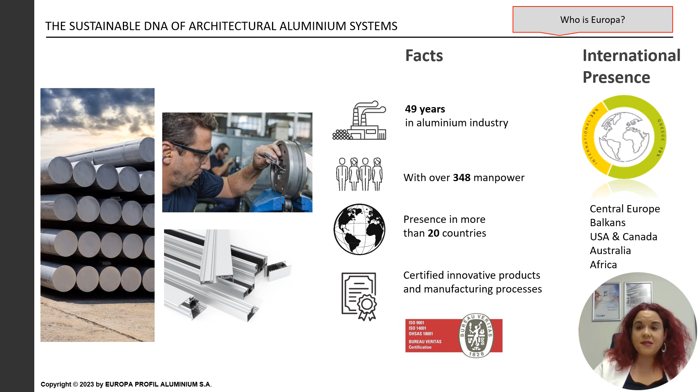Firstly, let's see some basic data about Europa. Europa has almost a 50-year history in the aluminum industry with over 348 people manpower. It has presence in more than 20 countries, producing certified innovative products through its manufacturing processes. Europa has international presence, like in Central Europe, Balkans, USA and Canada, Australia, as well as Africa.

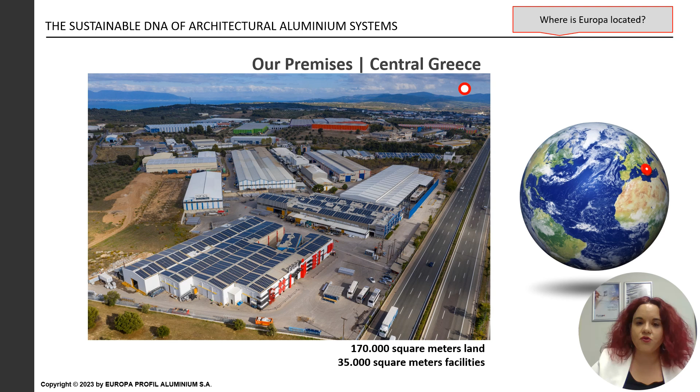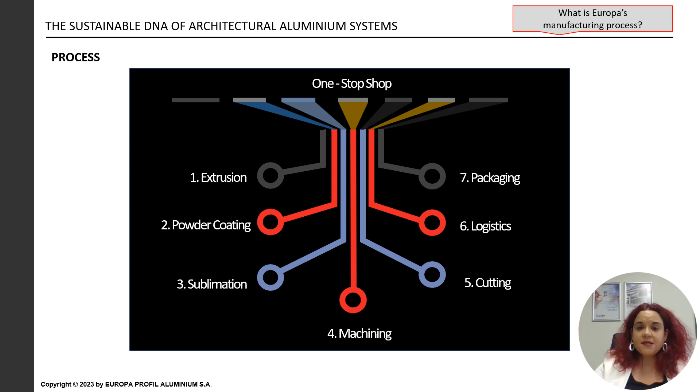Europa's premises are located in Inofita in central Greece, on about 170,000 square meters of land, and specifically, our facilities cover an area of 35,000 square meters. Europa's manufacturing process consists of the following departments: the extrusion lines, the powder coating and sublimation lines, the machining and cutting operations, and of course the logistics and packaging operations.

Europa has expertise in aluminum systems. Aluminum systems are divided into four significant categories. The first one refers to the architectural aluminum systems, like opening, sliding, folding, roller shutters, insect screens, office partitions, and curtain walls. The second category is the outdoor systems, like louver shading systems, pergolas, security doors, railing systems, and aluminum panels.

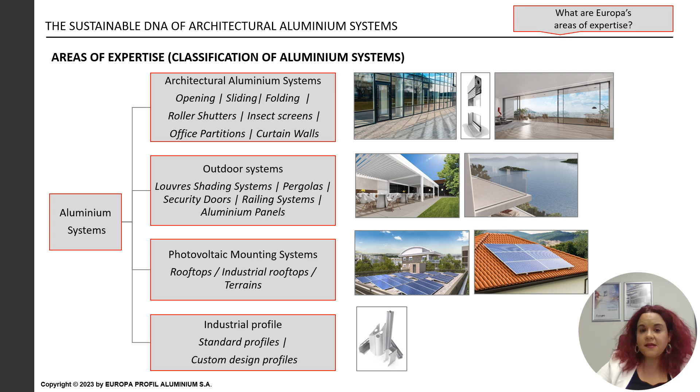The third category is the photovoltaic mounting systems, such as rooftops, industrial rooftops, and terrains. And last but not least is the industrial profiles, like standard profiles and custom design profiles. Europa's product applications can be found at home, like doors and windows, ending in energy efficient houses, at the office, like facades, windows, and partition walls, and of course in tech, in the form of transportation parts and robotic compartments.

The advantages of aluminum are numerous. Beginning from its recyclability over 90%, aluminum has long service life and low maintenance requirements. It releases no dangerous substances, so it's a non-toxic material. It offers fire safety and a wide choice of alloys. Furthermore, it has design flexibility and numerous surface finishes. It is a lightweight material with high reflectivity and thermal conductivity, offering optimal security, corrosion resistance, and of course sound absorption. From all the above mentioned points, it is concluded that aluminum is a sustainable material by definition.

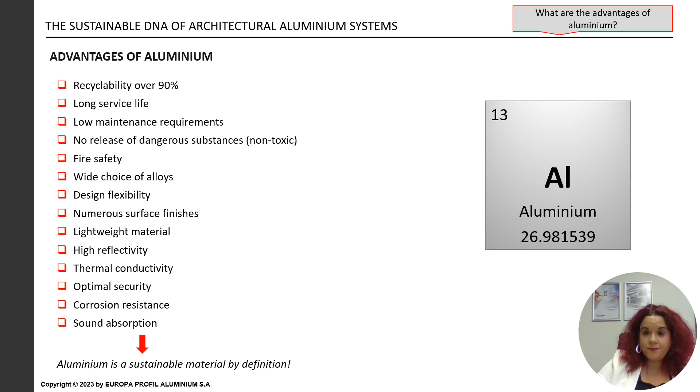Based on their technology, the aluminum systems are divided into two significant categories. On the one hand, there are the mill-finished systems, which consist only of aluminum, and on the other hand, there are the thermal break systems, which consist of aluminum and polyamide, where the polyamide creates barriers separating the exterior surface from the interior surface, ending in highly energy efficient structures. Moreover, the aluminum systems can be found either powder coated or not.

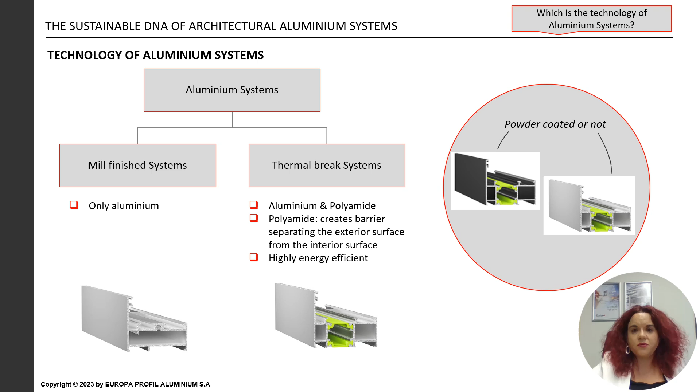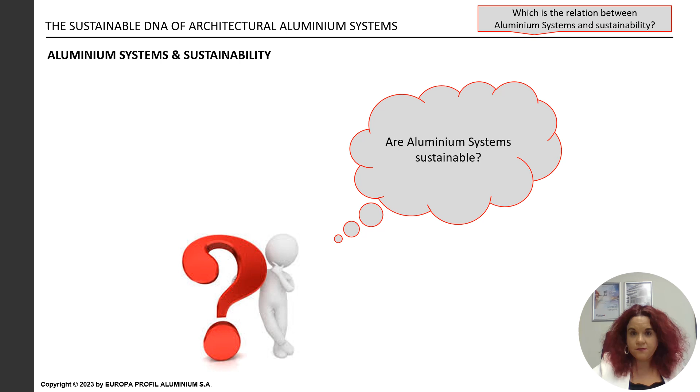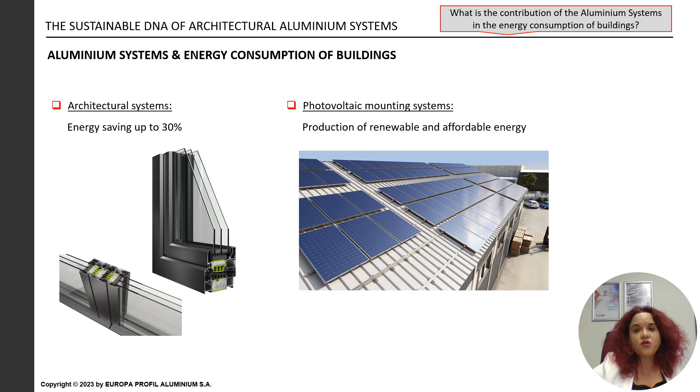So, what is the relation between the aluminum systems and sustainability? Are aluminum systems sustainable indeed? Let's see together. Regarding the contribution of the aluminum systems to the energy consumption of buildings, it is clear that the architectural systems save energy up to 30%, while in the case of the photovoltaic mounting systems, they contribute to the production of renewable and affordable energy.

So let's analyze together an example, a case study on building retrofitting. Beginning from the building data, we have a residence of 112 square meters area with construction date before 1980, located in Kallithea, Attica, Greece, without neighboring properties. It has air conditioners and an electric boiler, and its existing energy class is Eta.

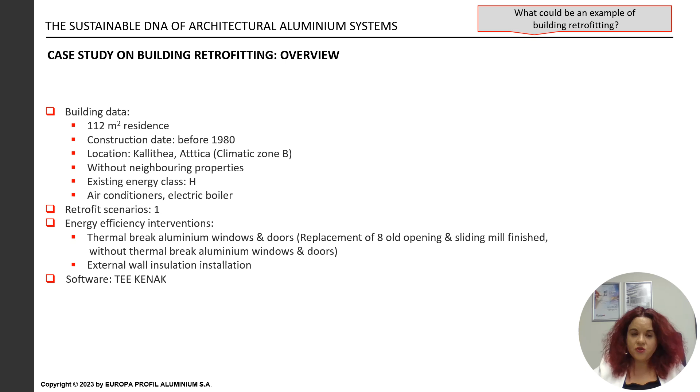We have implemented one retrofit scenario and have selected the following energy efficiency interventions. Firstly, the thermal break aluminum windows and doors. We replaced the 8 old opening and sliding mill-finished aluminum windows and doors without thermal break with new ones, and we installed external wall insulation as well. We implemented the software of the TEE KENAK.

More specifically, let's analyze in detail the relevant interventions. Firstly, we decided to replace the old windows and doors with new thermal break aluminum ones with 24 millimeters polyamide, where the relevant product which can help us understand better the technical specifications of this replacement is the EOS 60 hybrid, the opening thermal break aluminum system of Europa.

The next intervention was the external wall insulation installation, where we took into account the maximum Uw, the maximum U value of the windows, according to KENAK, the regulation for buildings' energy efficiency.

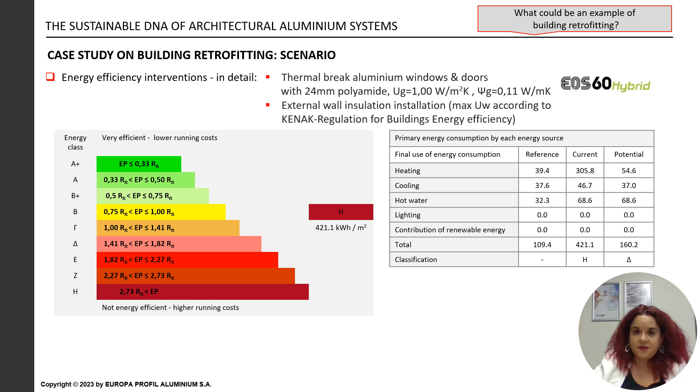As a result, we can see the relevant conclusions of the interventions which took place, and specifically the energy saving was calculated at about 261 kilowatt hours per square meter, and the energy saving percentage and relatively the cost saving percentage was calculated at about 62%, where the classification from Eta became Delta.

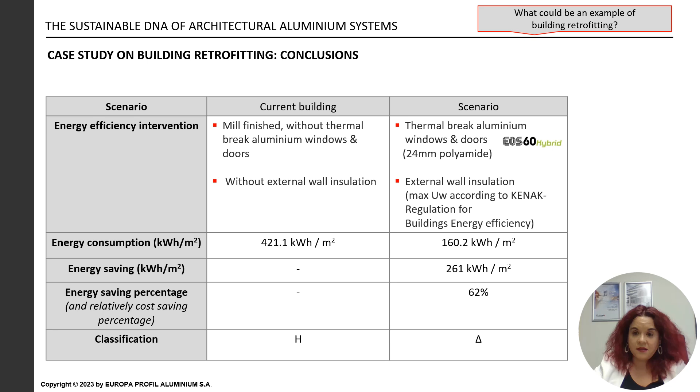Europa takes into account some specific principles regarding the sustainable development of its products. Beginning from the energy efficiency of the products, of course, Europa cares for the conservation of the resources, the environmentally friendly character of the products, their durability and the capacity for repair, the end of life, and their recyclability.

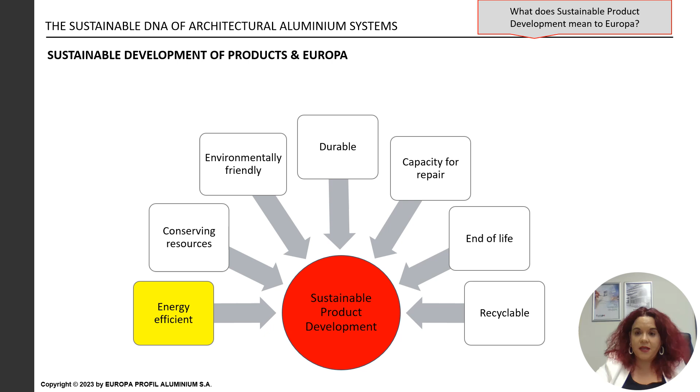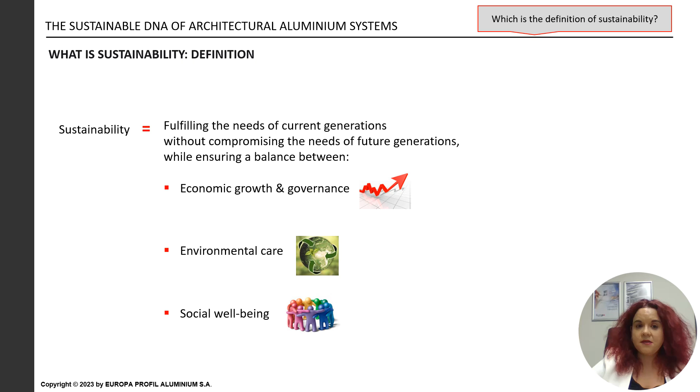Let's analyze together what is sustainability. Sustainability is the fulfillment of the needs of current generations without compromising the needs of future generations, while ensuring a balance between the economic growth and governance, the environmental care, and the social well-being.

As characteristic examples of sustainability in an aluminum extrusion industry like Europa, the aluminum scrap recycling could be considered as an example in the environmental protection sector. Furthermore, the profitability of the enterprise is definitely a good example regarding economic development. And finally, the workplace health and safety is a characteristic example concerning the social progress sector.

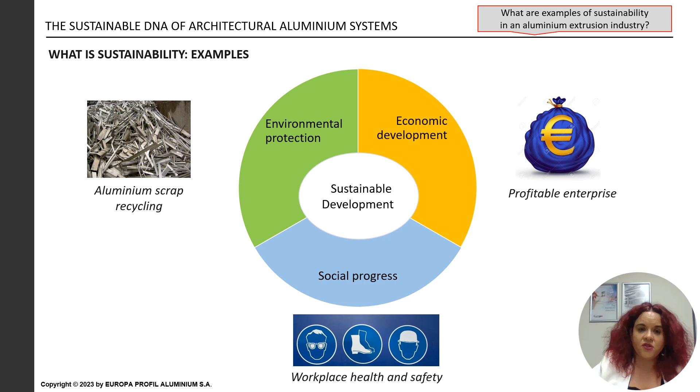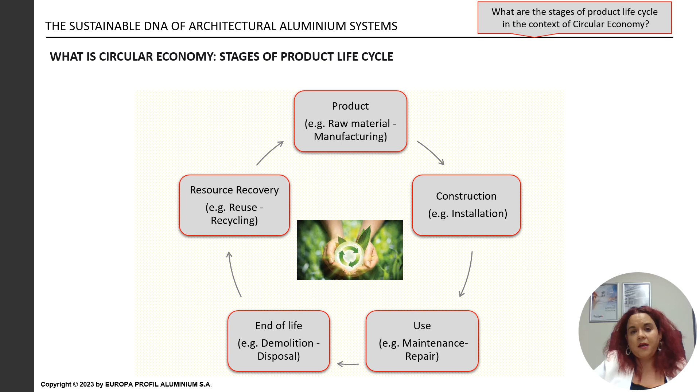Circular economy of building products follows specific stages of product life cycle. So, beginning with the product stage, like the raw material and the manufacturing, the next one is the construction stage, like the installation. Following this is the use stage, like the maintenance and the repair. The end of life is the next stage, like the demolition and the disposal. And the final stage is the resource recovery, for example, the reuse and recycling. And this cycle is eternal.

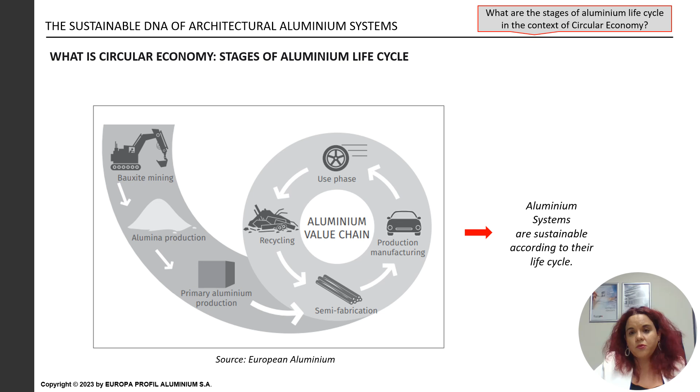The next stage is the semi-fabrication and the production manufacturing, where Europa Profil Aluminum participates. The use phase is the next one, and the recycling is the final stage. We can see that this cycle is eternal as well, like the previous slide. So, aluminum systems are sustainable according to their life cycle.

Following the previous mentioned stages of circular economy, I think it's very interesting to present you the definition of EPD. The EPD is an environmental product declaration. It is supposed to be reporting of quantitative environmental data about products, calculating specific indicators based on international standards. The EPD is a demonstration of manufacturers' commitment to sustainability.

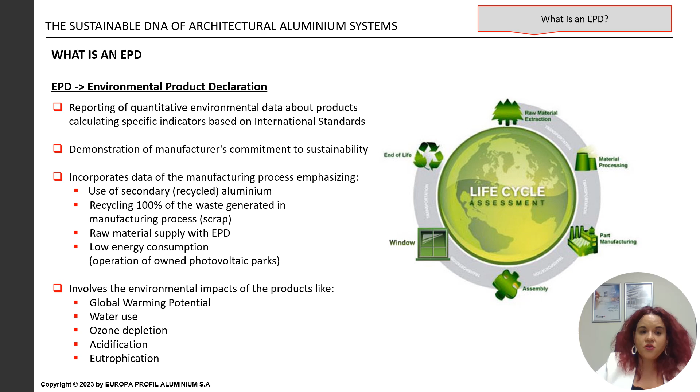This declaration incorporates data of the manufacturing process, emphasizing the use of secondary aluminum, the recycling of 100% of the waste generated in the manufacturing process, namely the scrap, the raw material supply with EPD, as well as the low energy consumption, for example, operation of owned photovoltaic parks. The EPD involves the environmental impacts of the products like the global warming potential, the water use, the ozone depletion, the acidification, and of course the eutrophication.

So, what are the benefits of an EPD? Why do we need an EPD? The EPD offers the engineer transparent information about product environmental performances from a life cycle perspective, so it helps for assessment of the project and environmental performance with accuracy and product comparability. Secondly, the EPD reflects the manufacturing process through which the product was produced. So it is third-party verification of product sustainability with the aim to reduce energy consumption of manufacturing.

Thirdly, the EPD contributes to rating of various green building certification systems like LEED and BREEAM, with the result of accelerating construction of low carbon buildings. Moreover, the EPD promotes a new environmentally friendly mindset and way of thinking, leading to raising awareness of stakeholders and confronting climate change. Finally, the EPD meets the end user sustainability requirements and helps for making conscious choice of products by the end user in line with sustainable development.

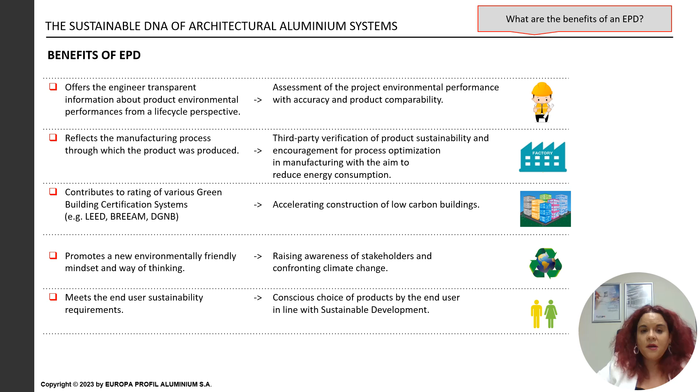Here we can see the 4 different EPDs which Europa owns for its aluminum profile products, specifically the mill finished, the coated, the thermal break mill finished, and the thermal break coated aluminum profile.

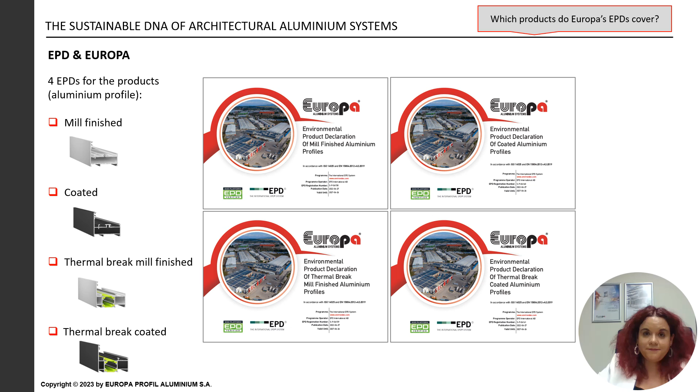Let's continue analyzing what is an HPD. An HPD is a health product declaration. It is supposed to be a standardized report used to disclose the various building materials and substances, as well as their possible human health effects and hazards. Furthermore, it contributes to rating of green building certification systems like LEED and WELL. And finally, it promotes openness in sustainable constructions.

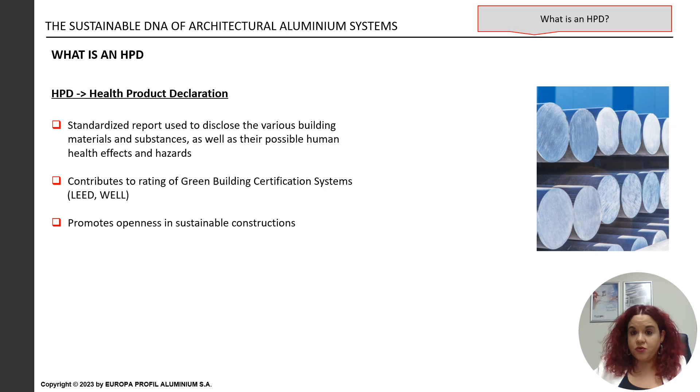So, here we can see the 4 different HPDs which Europa owns for its products, and specifically for mill finished, coated, thermal break mill finished, and thermal break coated aluminum profile.

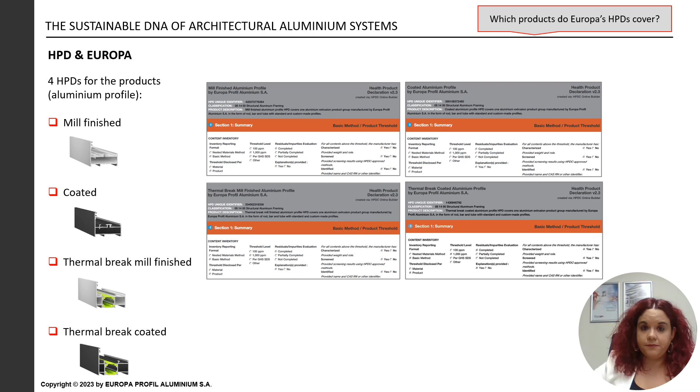Let's continue with the green building certification systems. These systems are used for recognition of construction and operating specifications that comply with specific requirements and criteria. Furthermore, they set high standards, significantly affecting national legislation, the building materials industry, as well as the real estate market. Finally, they contribute to assessment of building sustainability. Some globally well-recognized certification systems are LEED, originated in USA, BREEAM, originated in UK, and DGNB, originated in Germany.

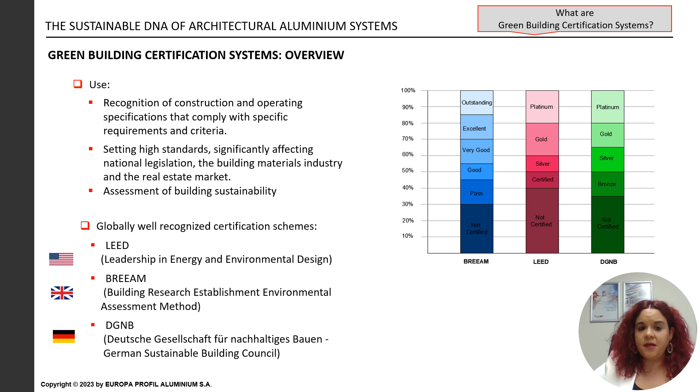So what is an example of green building certification system? Definitely, LEED certification is one good example. It is certification through a rigorous process of assessment. It refers to projects granted a rating in order to demonstrate the verified sustainability of the buildings. There are 9 different scoring areas, 9 different categories, offering points regarding the project's rating. One of them is the category of materials and resources, where EPD and HPD offer points.

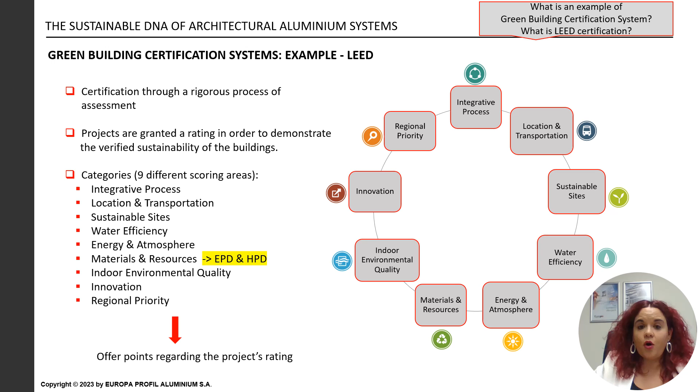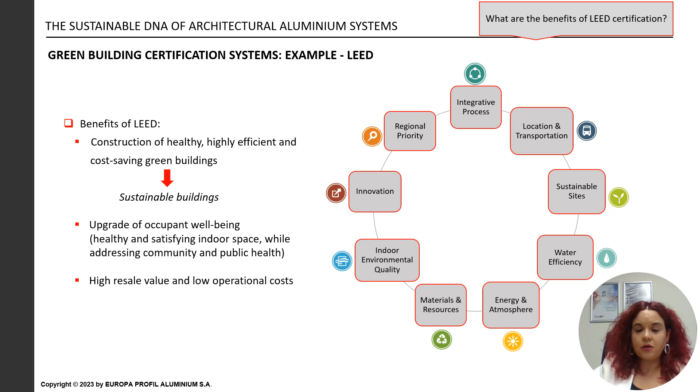Let's continue with the definition of passive house. Passive house was originated in 1988. It is a voluntary standard for energy efficiency in a building, which reduces buildings' ecological footprint and enhances building sustainability. Passive house uses a combination of low-energy building techniques and technologies.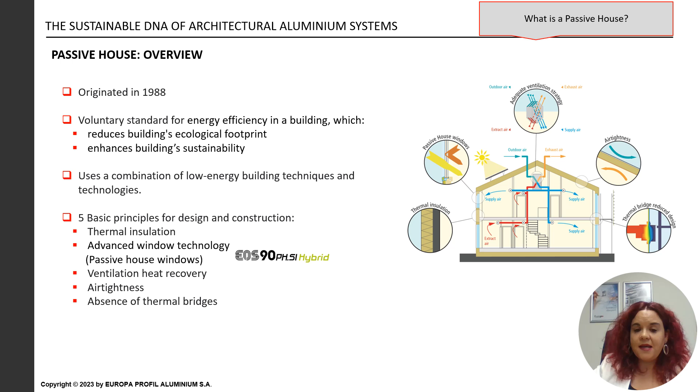There are 5 basic principles for design and construction: the thermal insulation, the ventilation heat recovery, the air tightness, the absence of thermal bridges, and of course the advanced window technology with passive house windows, where EOS 90 PHSI hybrid of Europa is a typical example.

One typical example of architectural aluminum systems suitable for passive houses is definitely the opening system EOS 90 PHSI hybrid of Europa. It is a thermal break opening system with frame width of 180 mm achieving thermal coefficient of Uw 0.68 W/m²K, ending in extremely energy efficient and sustainable constructions.

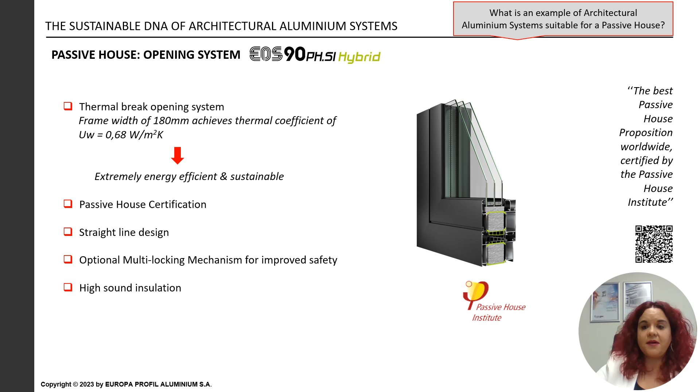This product has also passive house certification with straight line design, and it offers optional multi-locking mechanism for improved safety and of course high sound insulation. The best quote which describes this product is the following: "It is indeed the best passive house proposition worldwide, certified by the Passive House Institute."

Architectural aluminum systems can be found as special applications in buildings. For example, the curtain wall system ECW50 hybrid by Europa is a facade system with thermal insulation. It is found in 2 types, structural and standard. It is suitable for structures with vertical or angled surfaces, and it is found in 2 construction types with glazing thickness up to 50 mm.

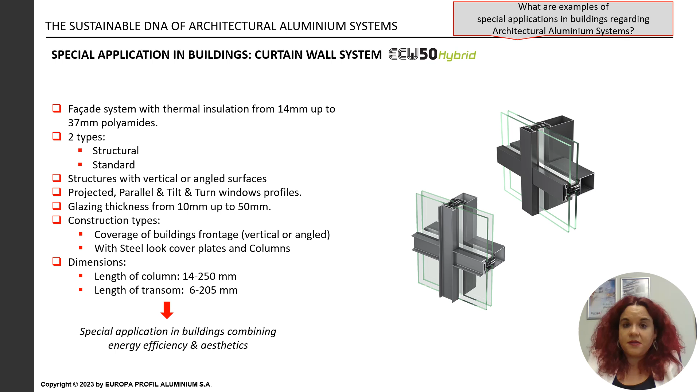Another typical example of special application in buildings is the shading and decorating system Europa Element. It is an integrated system that offers multiple solutions. It is found in great variety of designs and color coatings. Moreover, it can be used as exterior and interior aesthetic element, as integrated shading system, and of course as space partition element. Finally, it can be combined with multiple aluminum systems such as opening and sliding systems. From the above-mentioned points, it is obvious that it is a special application in buildings combining both energy efficiency and aesthetics.

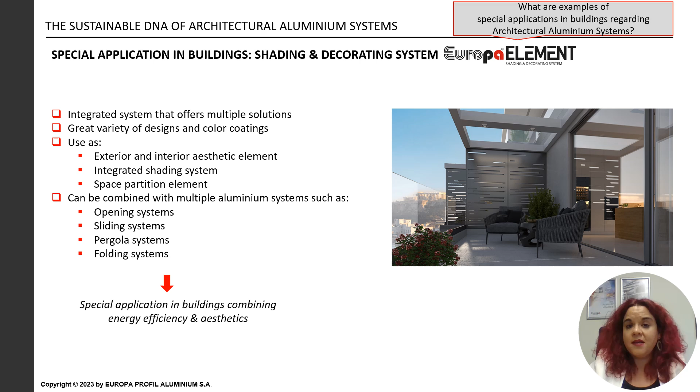In conclusion, aluminum systems are sustainable based on, firstly, the nature of raw material itself, the aluminum; secondly, the application in buildings with a view to either improving their energy efficiency, the architectural systems, or producing clean energy, the photovoltaic mounting systems; the life cycle assessment and the EPDs; of course, the HPDs; the contribution to rating of green building certification systems; moreover, the application in passive houses leading to extremely energy efficient constructions; and last but not least, the special application in buildings combining energy efficiency and aesthetics.